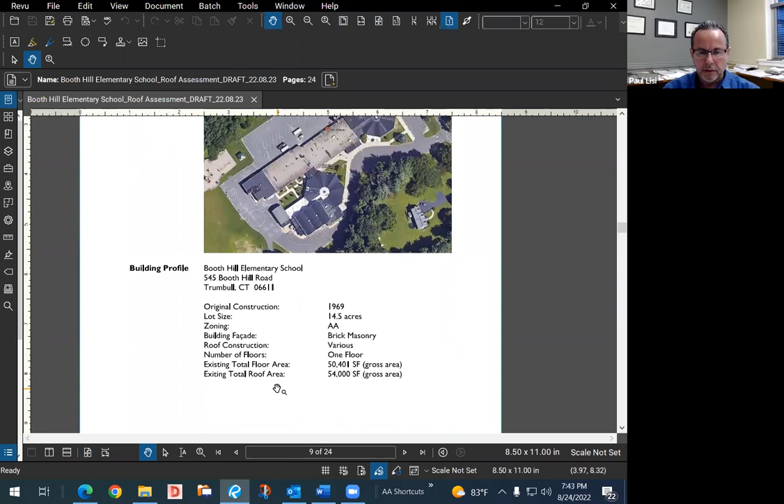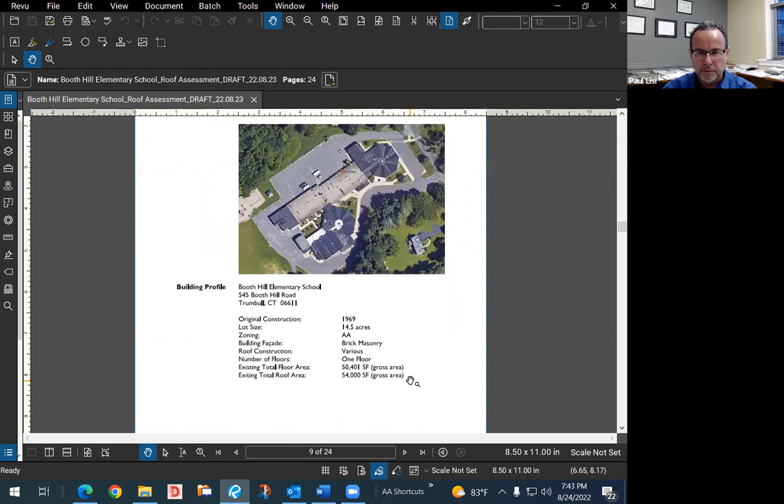I see actually there's a typo here, the roof area. No, actually, this is correct. 54,000 square feet, and the floor area is 50,000. So obviously the roof area is a little bit larger. So here's the entire roof. We'll get into the specifics, but you can see from this image alone that this is an older roof that hasn't been replaced in quite some time. This is a newer addition. These areas, I believe, were replaced in the mid 90s, the roofing. Okay. So moving on.

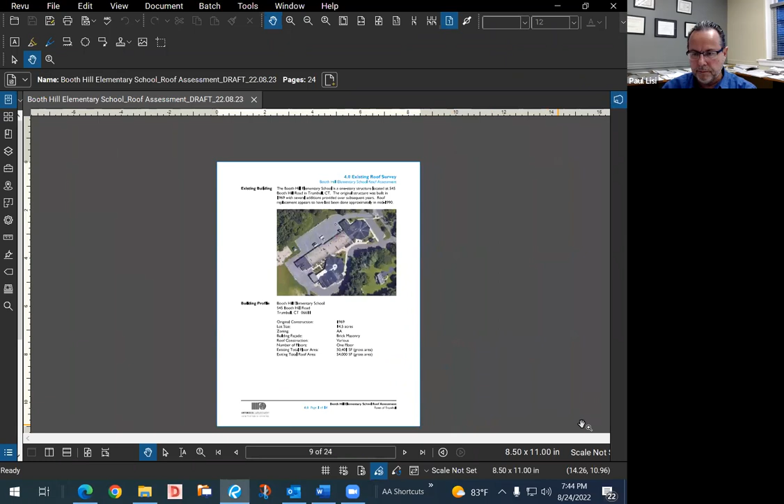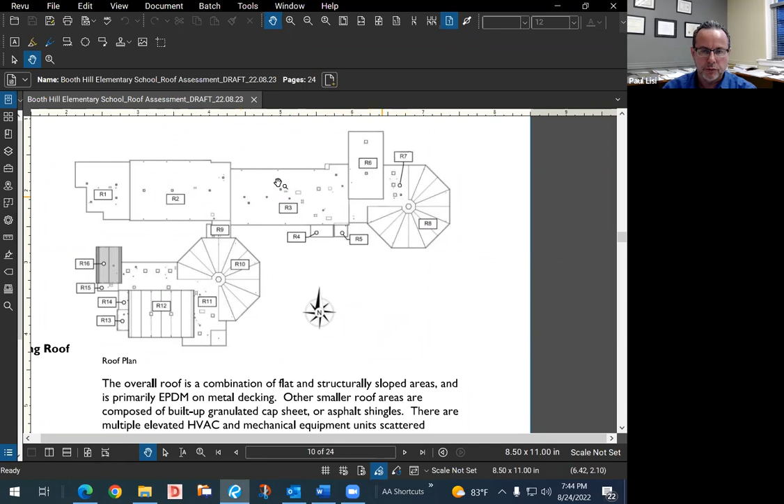We created a key plan to identify each of the roof areas from R1 all the way to R16, so when we're referring to these areas throughout the project, we could clearly identify which area we're talking about. If you go up on the roof and take a quick look, in general it appears to be in good shape. If you don't do a whole lot of exploration, there isn't anything obvious. There aren't any tears. I don't believe there's been roof leaks, at least that I'm aware of.

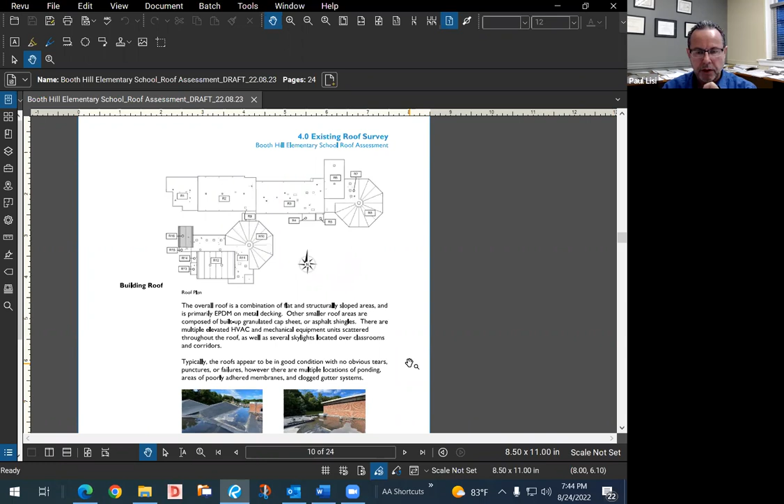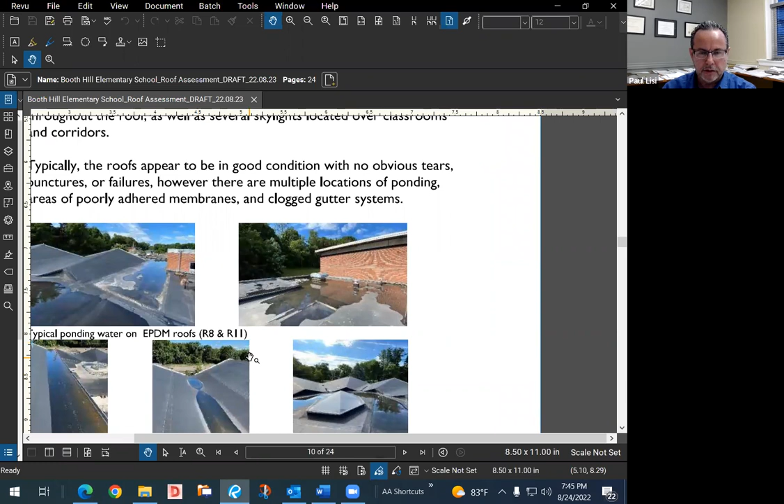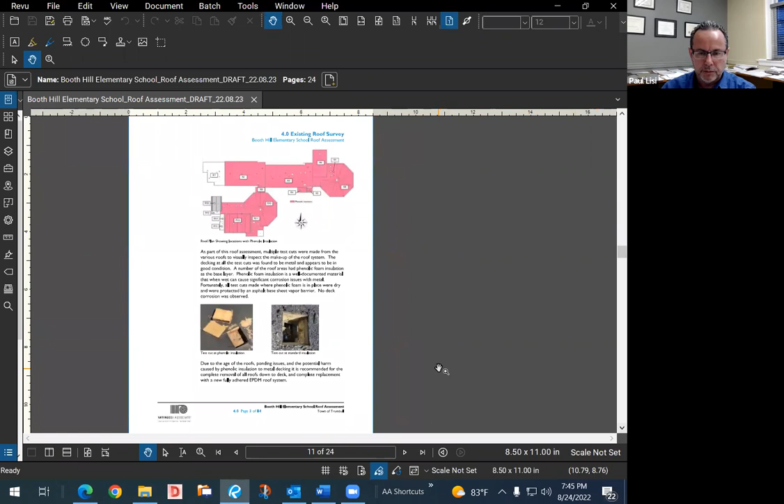There's some ponding you'll see from the photographs here, but that's not unusual, and we'll get into some of the specifics. But again, there wasn't anything that stood out as far as damage to the roofing membrane itself. Okay. So we'll go on to looking at each individual area. Well, before we go out there, this is important. Here's some of the roof cuts we've done. This shows you on the right typical insulation. This is in the newer area.

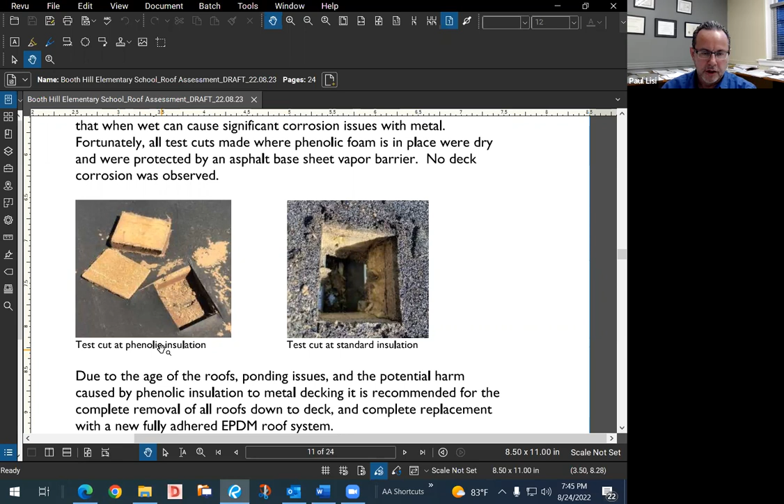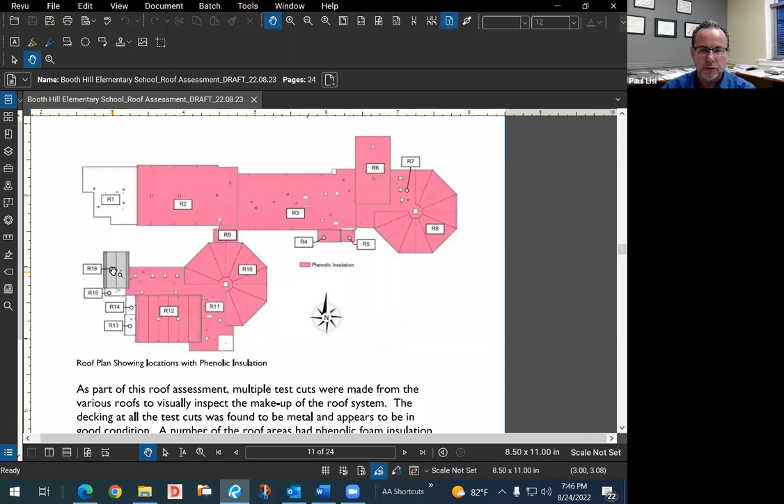On the left is a test cut of what's referred to in the industry as phenolic insulation. If you look at this diagram, everything you see in red has phenolic insulation. So clearly the majority of the building. This more recent addition doesn't have it, nor some of these newer areas and this asphalt shingle roof. But the majority of the roof has it. What's important to know about phenolic insulation is that it's basically a known item that creates rusting. It deteriorates metal decking.

The good thing for this building is that from all the test cuts that we've done, we didn't see any evidence of any rusting. Now, that doesn't mean there isn't any. But from the test cuts that we've done, we didn't see any rusting of the metal deck. So that's the good news.

And there's two reasons why we believe that we haven't seen rusting. One is that there hasn't been a whole lot of, if any, roof leaks. Because when the phenolic gets wet, that's when the problem occurs. The wet phenolic insulation has a chemical reaction with the metal decking, and that starts the corrosion problem. So there must not have been a whole lot of leaks, if any. And the other reason I think it's held up was because there was a vapor barrier installed between the insulation and the metal deck.

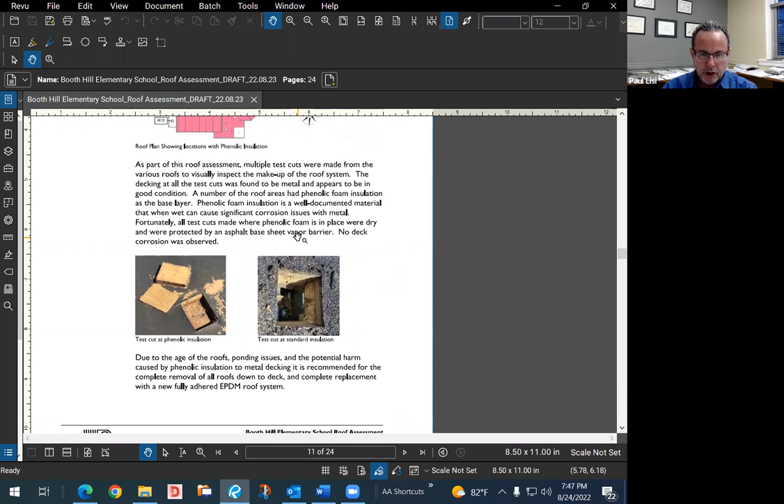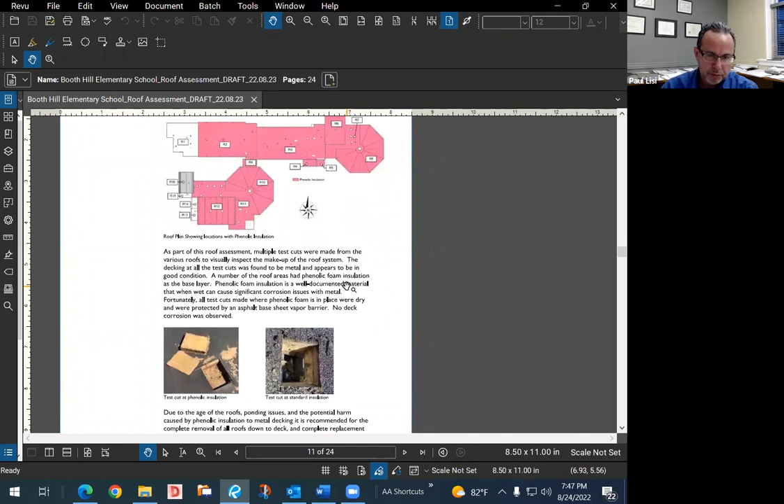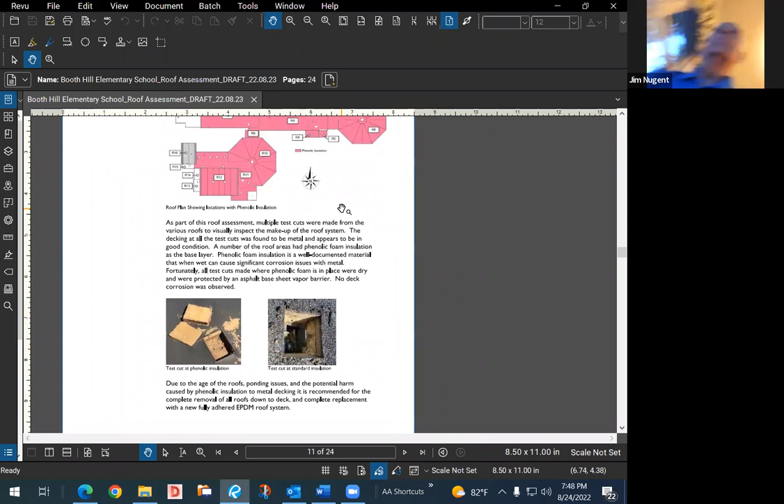So having said that, clearly this is something that needs to be removed, which would be removed anyway, but I just wanted to point out we did find that. And again, the good news is that, based on the cuts we've done, it has not caused any major damage to the metal deck, which is obviously a huge plus, because we've seen projects where this has caused substantial damage to the metal roof deck, and you can imagine the cost to repair.

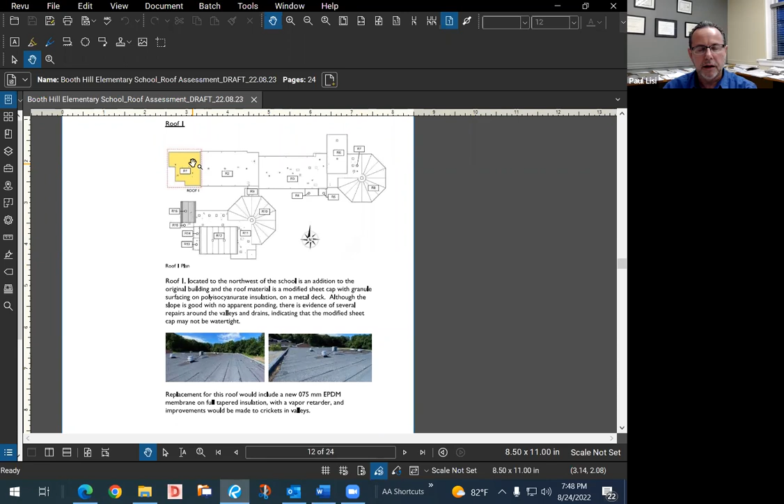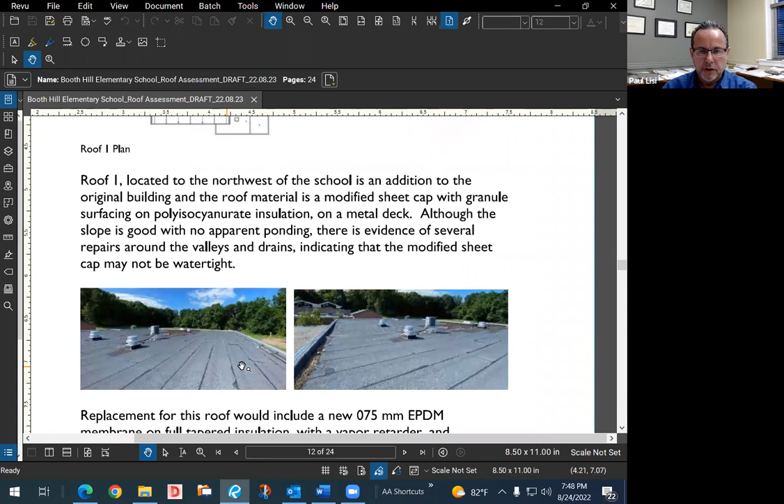So now we'll look at each individual area. Highlighted in yellow is what we refer to as roof area 1. This was an addition. I don't know the exact date of the addition, but clearly it's a newer wing. It has a modified bituminous roof on it. You could tell from these photographs. You could see the rolls of bituminous roofing.

This is in pretty good shape. Doesn't have the phenolic, but again, it's such a small area in re-roofing the entire building. Certainly, we wouldn't want to leave that out because it could be 20 years old, it could be 15 years old. I'm not sure, but it should be replaced as part of the entire roof.

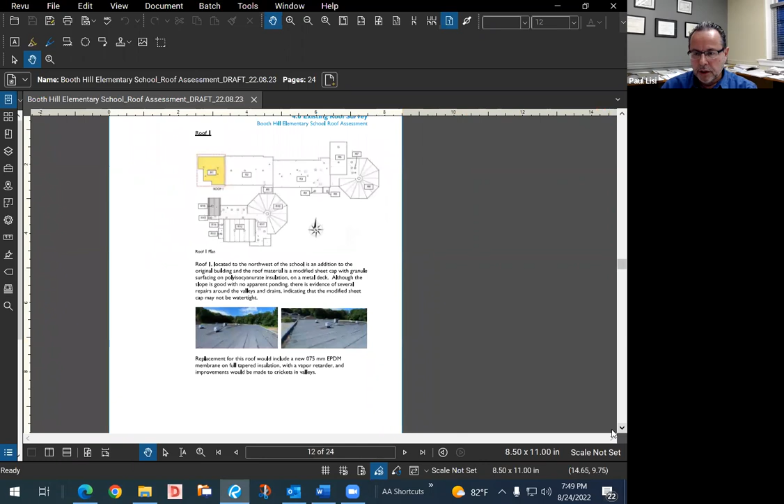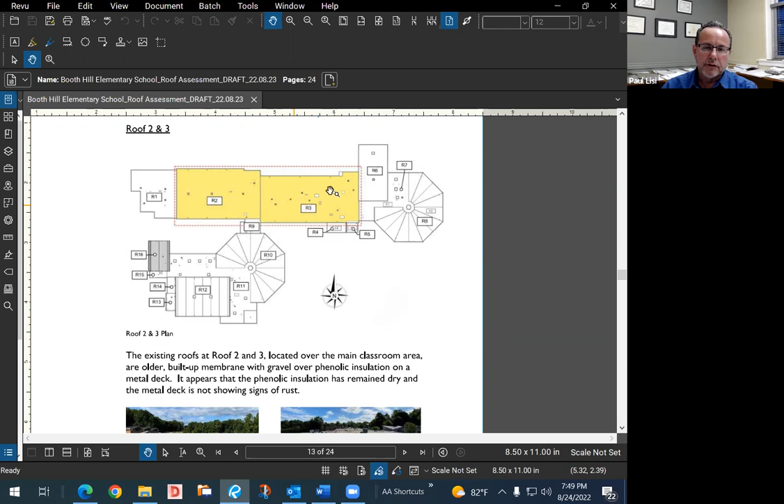The next area is R2 and R3, which you saw in the Google image, these are the oldest roof areas. And these are the old built-up membrane roof with the gravel. So these haven't been touched in over 30 years, apparently. So these certainly should be replaced. Okay.

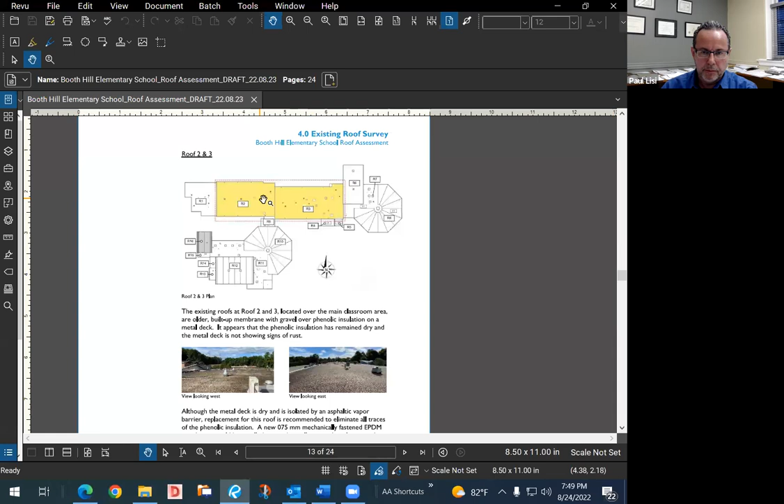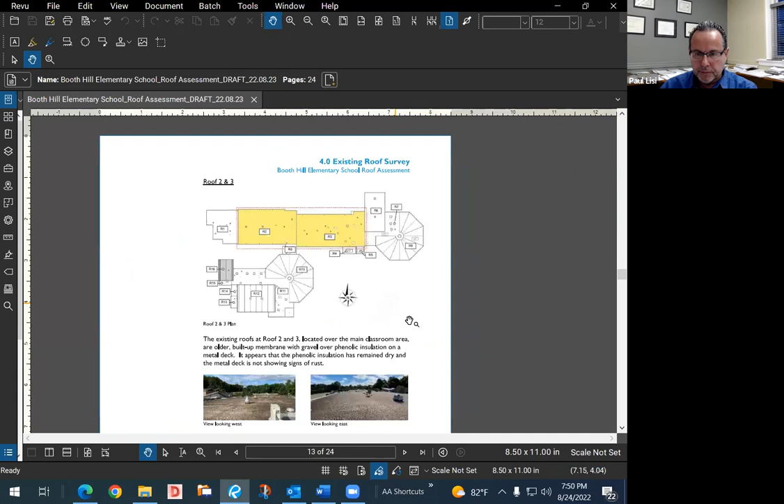These areas are pretty much dead flat. There isn't really any tapered insulation. There isn't a structure of the roof that's sloped. It's pretty flat, which is not unusual for buildings of this age. The R1 addition, that roof structure is actually pitched, has a slope to it. Okay. Now, then we'll go to the other areas.

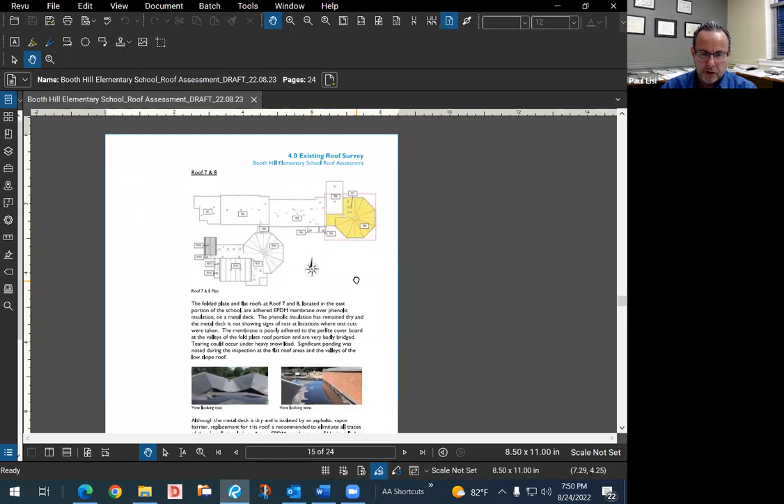R6. This is an EPDM roof. This, I believe, was replaced in the early 90s. Then you have what we refer to as folded plate roofs. I'm sure you're all familiar with them. These areas obviously are unique and have unique challenges. One of the important things that I want to point out on these is, can you all see this image of the valleys?

Yes. Okay, so I actually walked on part of this area myself, and what's happened over the years, the membrane must have shrunk a little bit, and it may not have ever been properly adhered. But you can imagine walking on a hammock or on a trampoline or a tent. This area here was not adhered to the deck, so you could see that the rubber was just suspended.

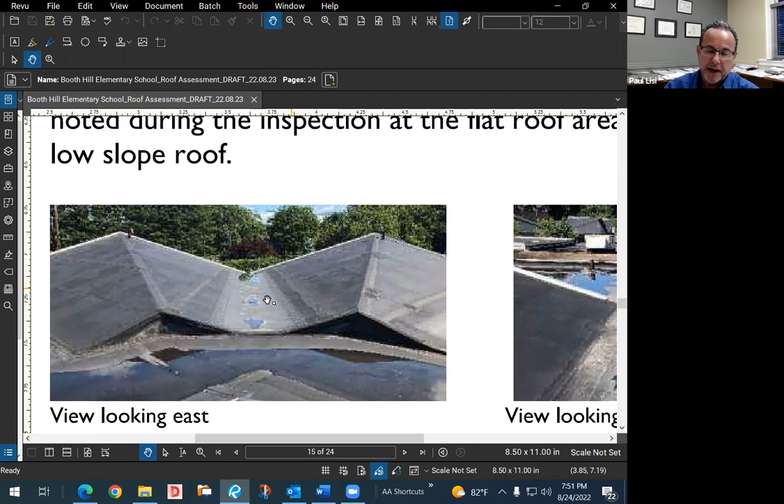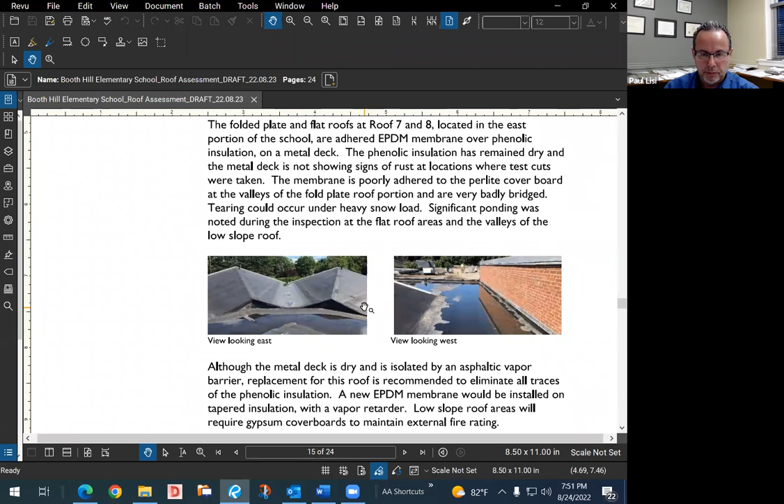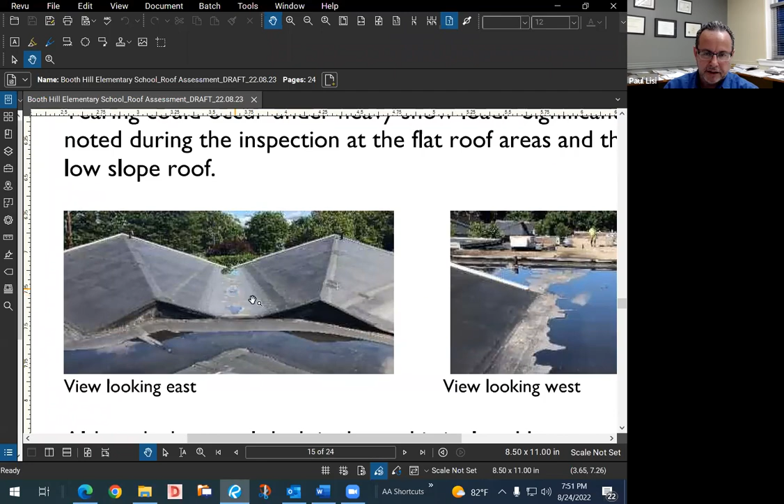And it's very fortunate that some heavy snow loads or somebody walking on it didn't puncture it. So those are major problem areas that certainly need to be addressed. There's some ponding here that we will look at. This is common for every valley in these folded plate roofs. Certainly something that needs to be addressed.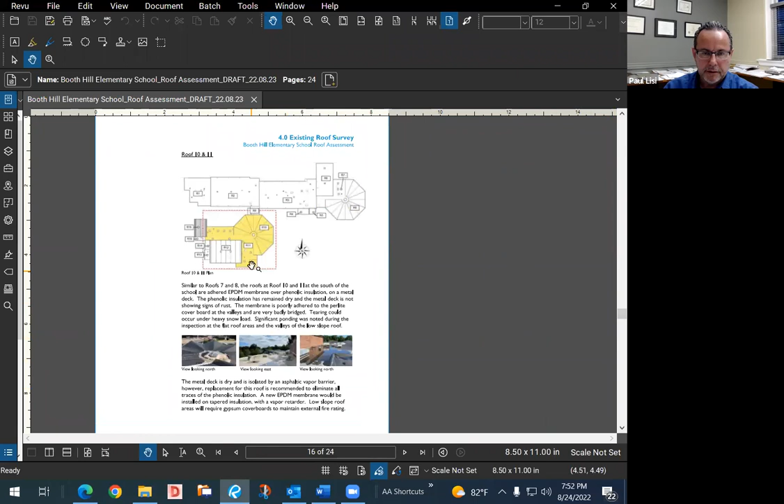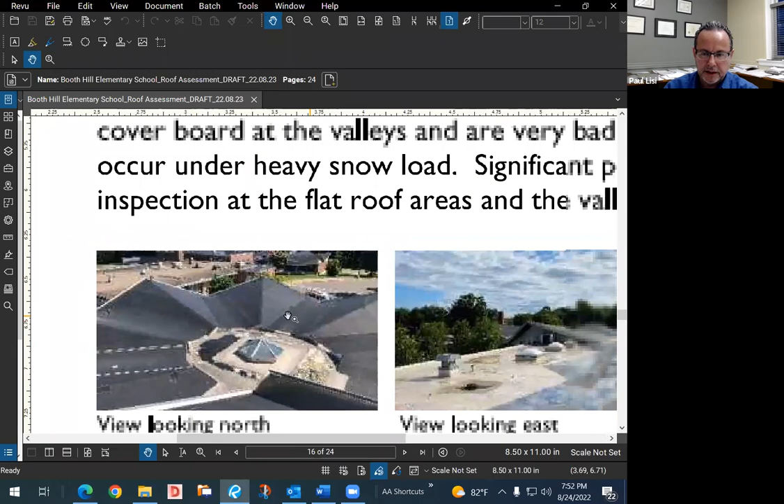Again, in R10, same issue. R11 and R10 were also early 90s. Again, you have these valleys. This is the R11 roof, some skylights. Here you have significant ponding.

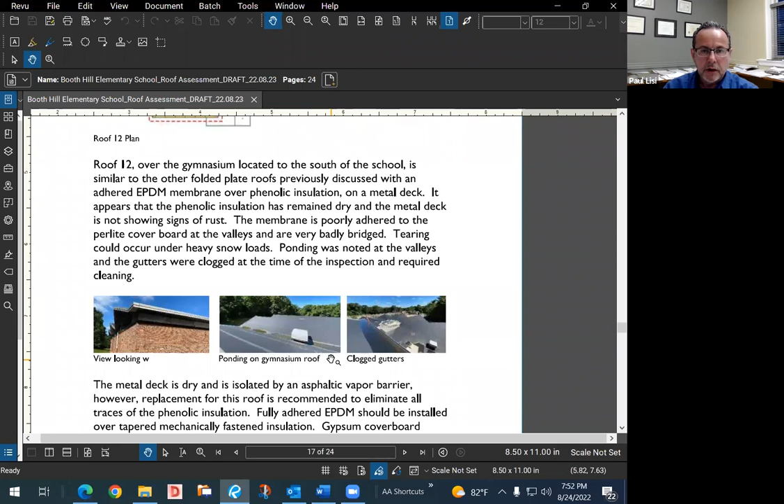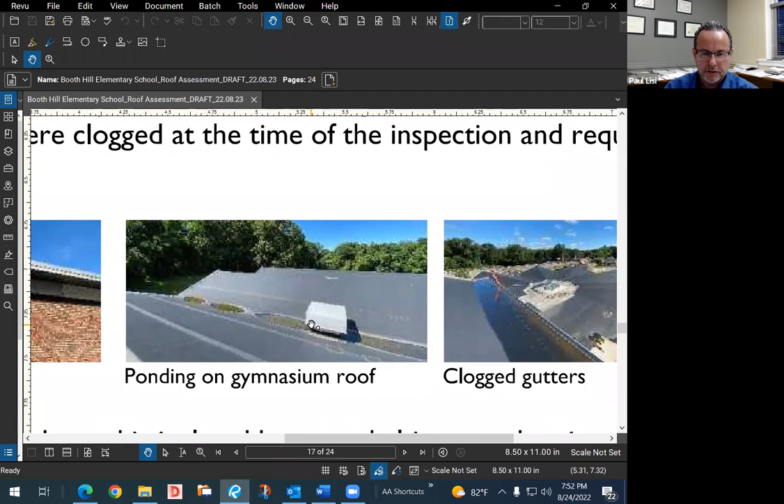And then you have the gymnasium, R12, which also has this sort of folded plate type roof. And you can see some ponding on here. This one was adhered a little bit better, wasn't as bad as the others. But again, it's at least 30 years old and needs to be replaced. There were some clogged gutters, but that's minor.

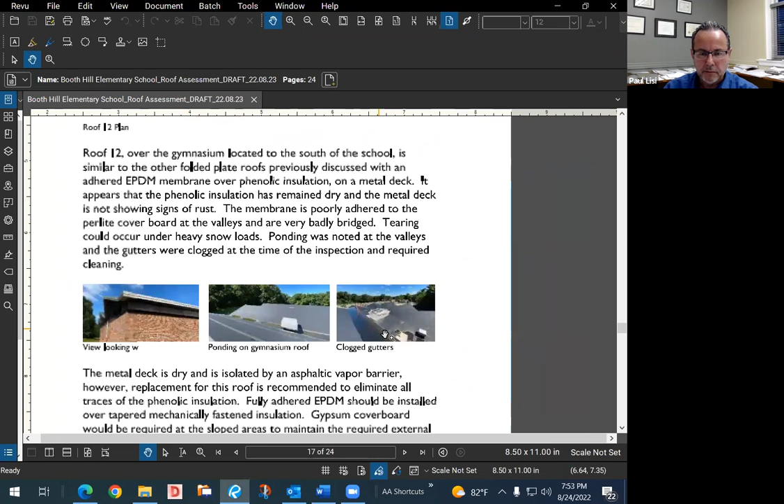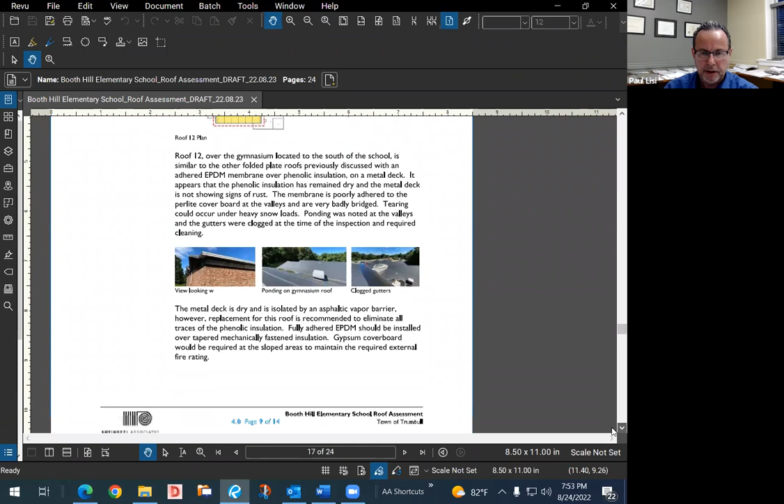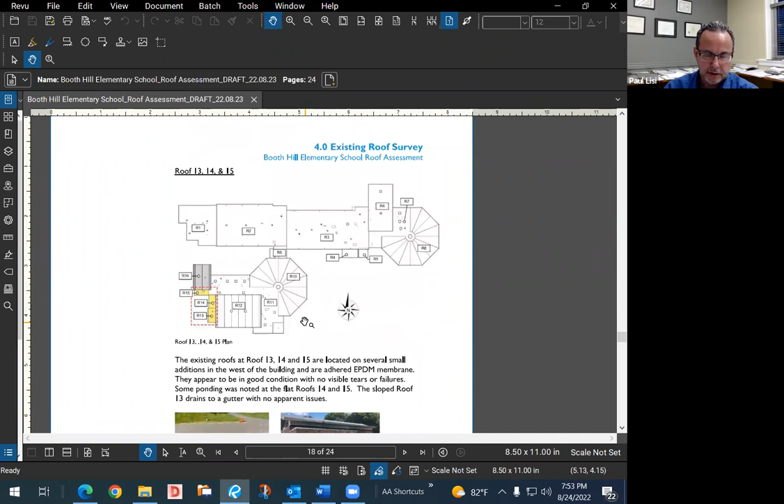Okay, and again, these were all replaced in the early 90s with EPDM. And the membrane itself is actually not in bad condition. Thank goodness, because there could have been major issues in those valleys, and there could have been major issues with that phenolic insulation. There's a few smaller areas. These may have been additions as well, such as R16.

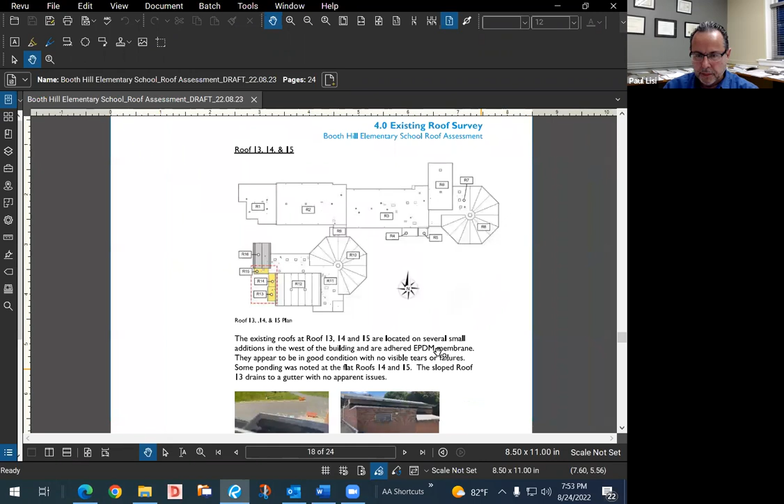And then the last one, I believe, is R16, which is an asphalt shingle roof, which again, it's such a small area that, since we're doing this entire project, I would say to just go ahead and replace that asphalt shingle roof as part of it. I think it's fairly old as well. There were some warped shingles, so I would recommend replacing that as well.

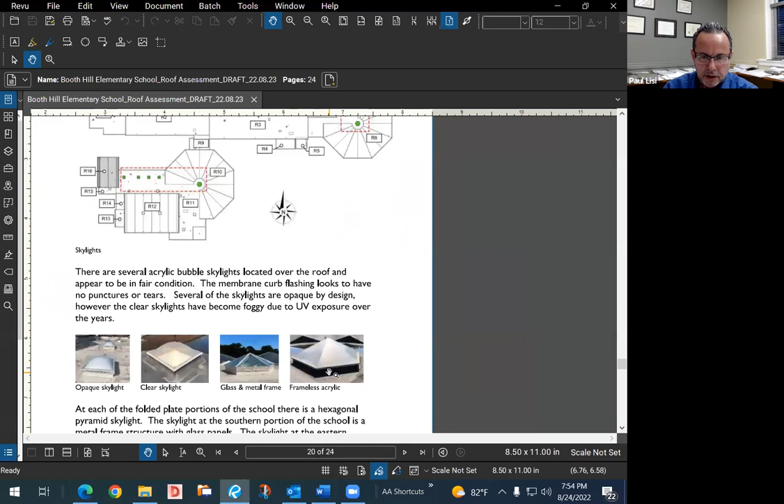Looking at the skylights, there's basically two areas that have skylights. In the center of this folded plate roof, there's a large skylight here, and then on this one here. And then you have a few smaller skylights in these flat areas. Here's that pyramid-shaped skylight that's in the middle of those folded plate roofs.

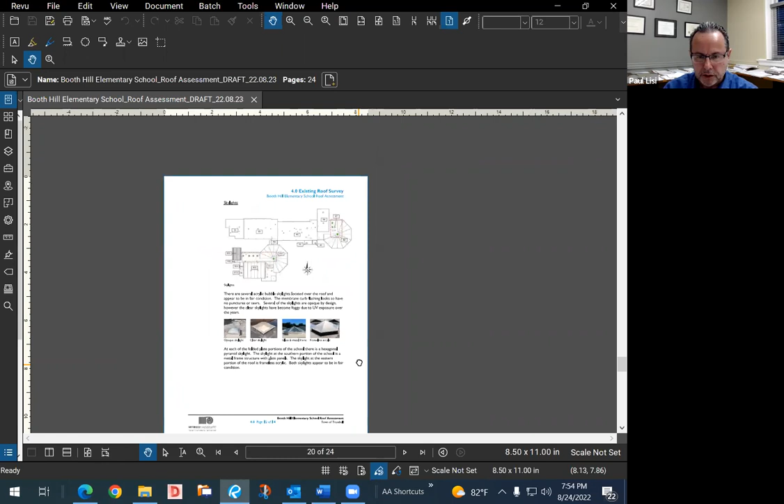Some of these may even be original. I would definitely want to replace these as part of the roof replacement. There's not a lot, so it's certainly worth the effort.

So in summary, because there are so many different geometries in this roof, all these angles and valleys, we are proposing to utilize a 90 mil roof for those valleys and the folded plate, and then a reinforced 75 mil EPDM roof for the balance. And so when we consider the different types of systems, we look at cost of material, right? We look at availability, we look at cost of labor, and certainly code requirements, the type of building it is, all of that, of course.

So having said that, today, obviously labor costs are very high, and factoring in all the unique conditions of this roof, we are recommending a reinforced 75 mil for the majority of the roof, and a 90 mil, which is a thicker roof, for the folded plate areas. And by default, this is going to give you a 30-year warranty.

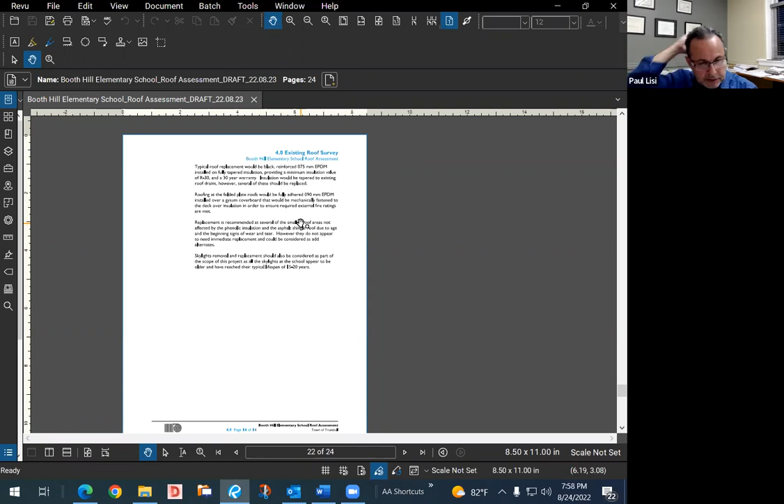So again, I want to emphasize this is a work in progress, and it may change as we continue through this. But you know, it's 90% there. So before I show you the tapered insulation plan, does anyone have any questions on this report?

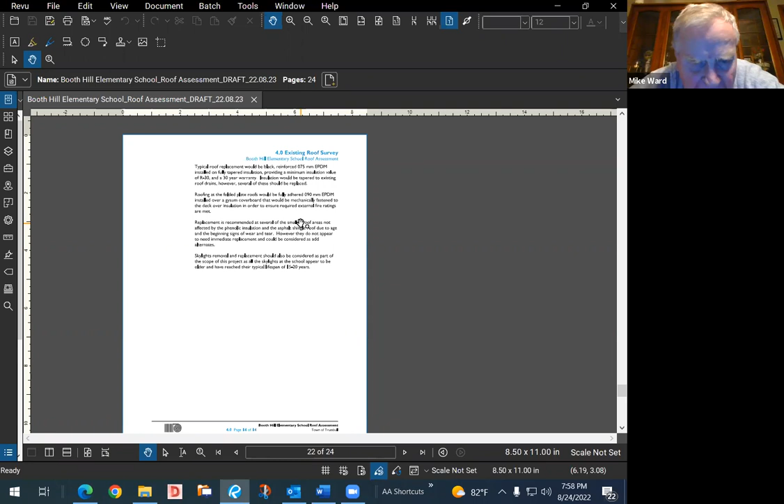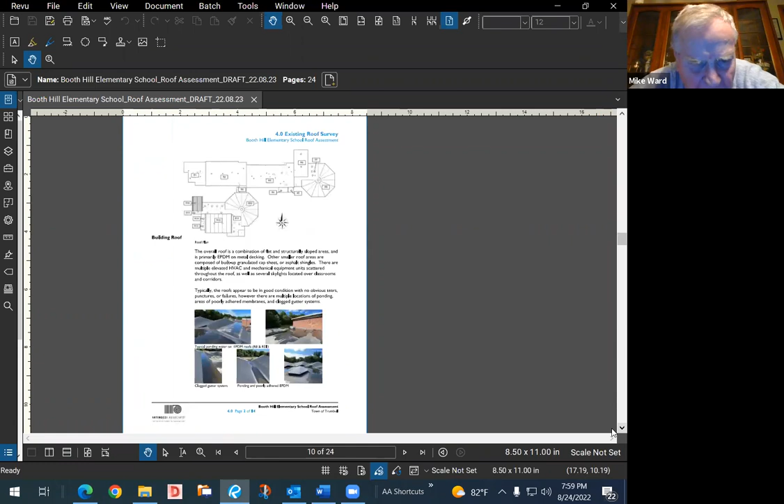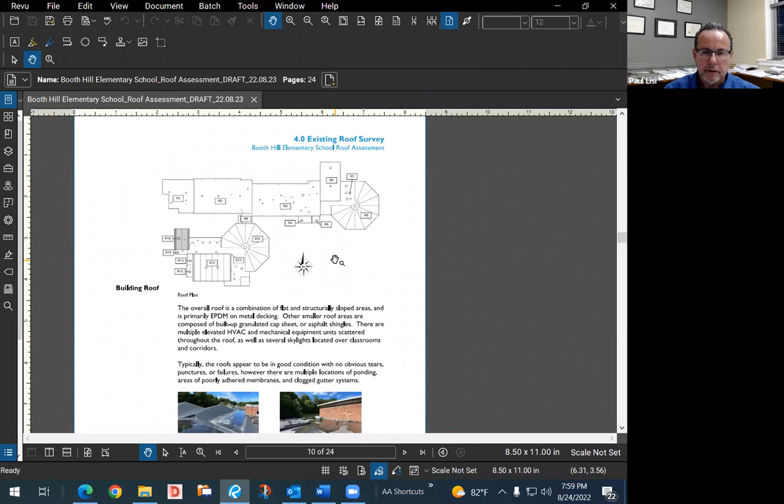Because I was the principal there in the 90s, the water was gushing down from the roof into the school for about three weeks before they decided to replace the roof. And then they did it back in the 90s, I guess. Yes. The addition of the TLC room may be the one you're talking about. This one was here? The roof over there. Yeah.

Then they added in 57 the additional rooms. And it was later on in the mid-70s, they decided to put the additional parts on it, make them all 21-room schools. The philosophy at that time, when Tashua School and Daniels Farm was built. But another reason why the roof, the old portion, was there was quite a bit of vandalism going on. Kids were coming in weekends and getting ladders and jumping up on the roofs.

So after the new building, a new roof was put on in the 90s, we had better security and there was no more walking up on the roof, and it was limited just to the head custodian to go up there, and nobody else was allowed on the roof. But you had to pretty much hit it on the way.

But the reason they replaced it in the 90s was the entire old section of the building, the water was coming down the walls. And Dr. Yetman was the superintendent. When he walked over and saw it, he said, I think we should replace it. I said, I think so. But it's an old building, but we'll see what happens. It was a nice report. Very nice. Thank you. Thank you, Mike.

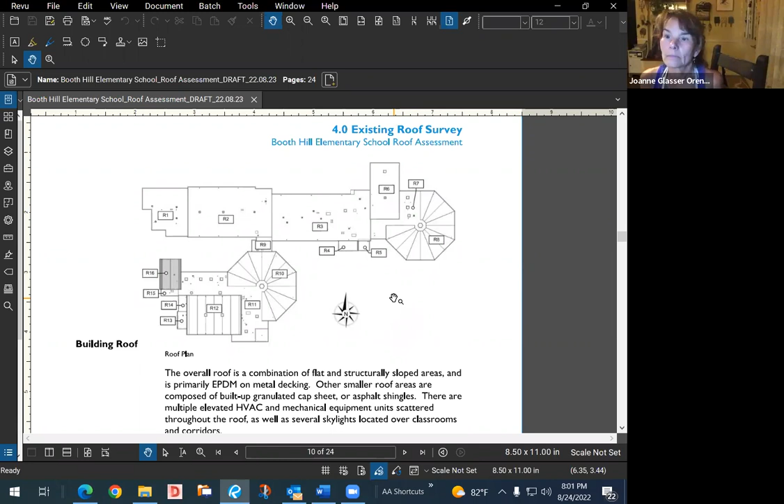Well, actually, the next diagram I will show you, we are proposing to do something that will alleviate that same issue happening again in the future. Thanks. So I have a question. Somebody else have a question before me? Okay, so this report is predicated on keeping this steel deck, am I correct? Yes. Okay.

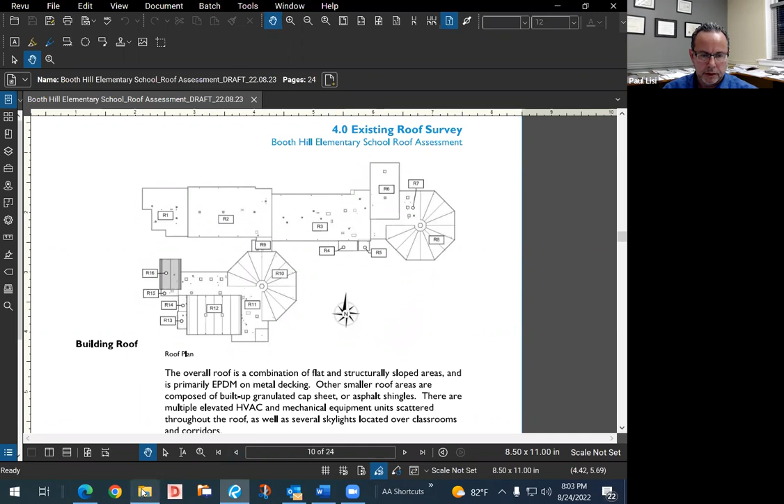So this is different from what we've proposed for the Middlebrook Elementary School. In what sense? Well, haven't we created a wooden structure in case we want to put solar panels at some point? No. I'm sorry. I misunderstood. Sorry. No worries. Okay, so if I could, I'll move on to, I want to show you what's referred to as a tapered plan.

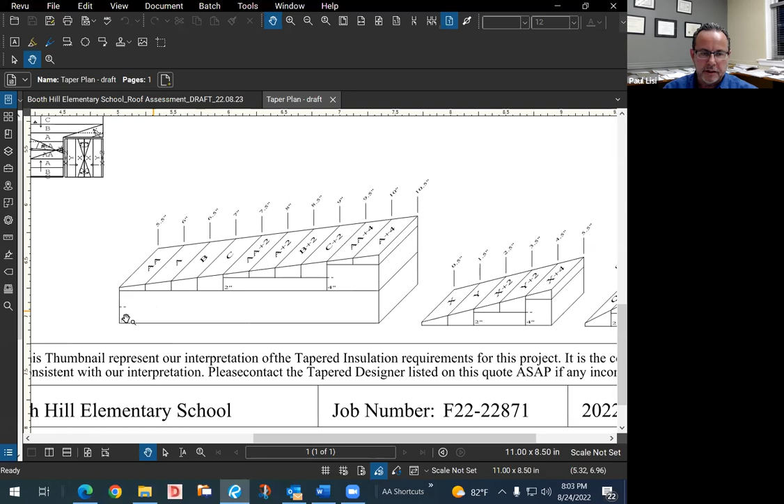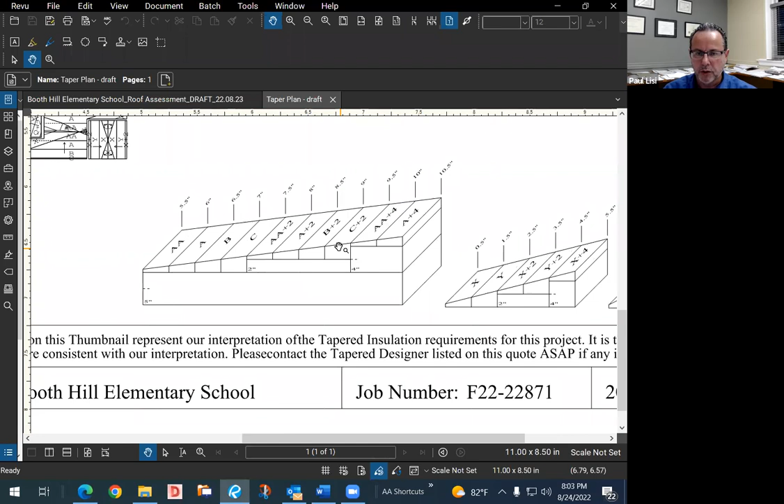Okay, this is a drawing that is generated by the manufacturers of the insulation. Okay, so I'll zoom in on here. There's a base insulation. It's 5 inches, 2 layers of 2.5 inches. That gives you your minimum R30 of insulation that's required by code, okay? And then everything else on top of that is tapered. And that's to provide the proper slope that's required by code of 1/4 inch per foot, okay?

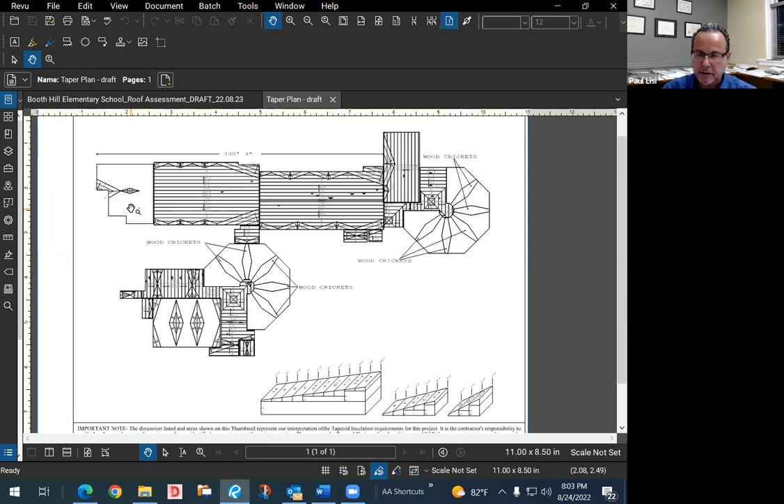That's very common to do because a lot of these older buildings, basically, the roof structure is dead flat. Unlike this area, the newer addition, this has a sloped deck, so there's no need for tapered insulation. Everywhere you see all these lines here, this is all tapered insulation. Again, not unusual, this is common. So what you see is, zooming in here, what's also nice about these buildings, most of this anyway, is that the drains are along the perimeter.

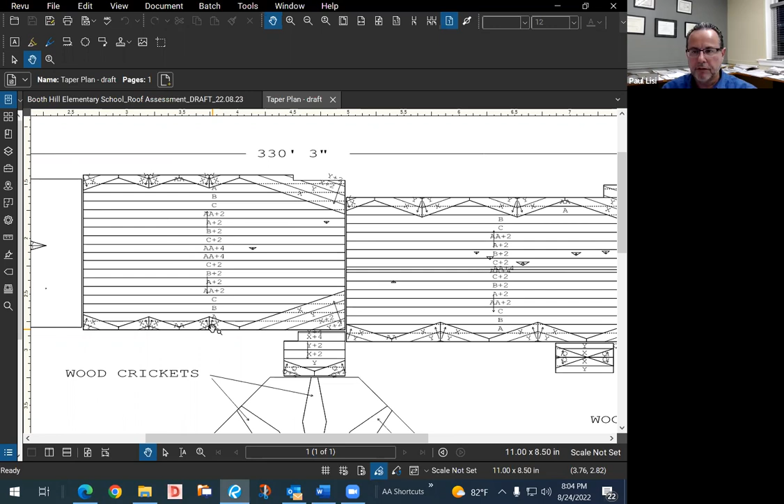What's good about that is that, unlike Middlebrook, where we had to introduce additional overflow drains internally in the building, in these cases, because the drains are on the perimeter, we can simply add scuppers, basically just small notches in the fascia. So if the main drains here get clogged, the water would simply flow out the scupper. Unlike if the drain was in the middle, we'd have to add another drain to get the water out. Okay, so that's the good news, so that's mainly these two larger areas.

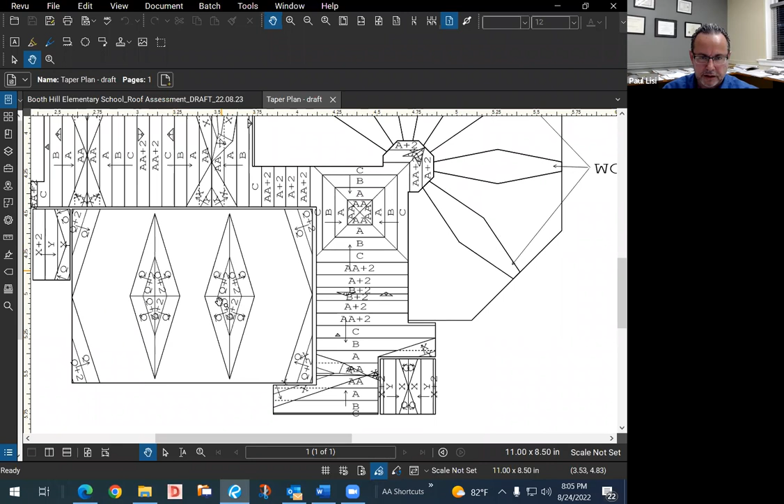Obviously, these folded plate areas have plenty of roof slope. And then the gymnasium is also, the roof structure does pitch. But we still are adding some tapered insulation. With these, what you see, these are referred to as crickets, if you're familiar with the roofing industry. And what all this does is take the water away from the valleys. Okay, you create these crickets so that you don't have ponding. So that's what we're proposing there.

Now, the question earlier from Joanne about, we don't want this to occur again. What we're proposing is to build up these valleys. If you can see where I'm pointing, it says wood crickets. Okay. Basically, what we're proposing is to build up these areas with wood framing and plywood, to not have these just simple valleys that we could have problems again in the future with the roofing.

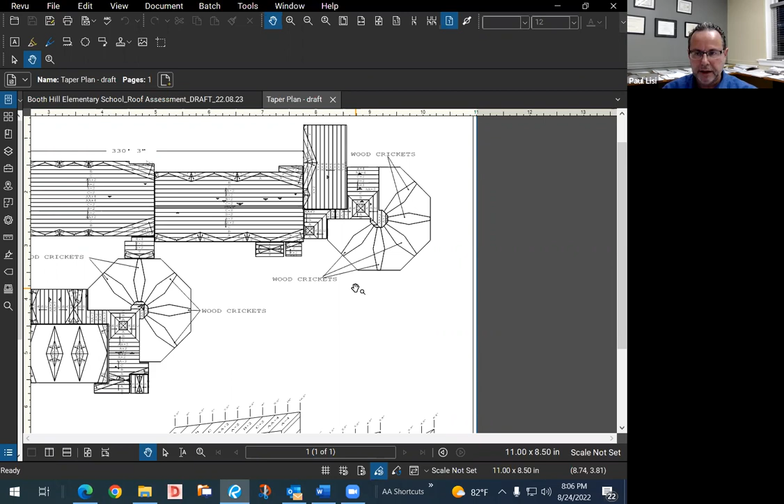So why not do this with tapered insulation? Because it would be a lot of tapered insulation. So rather than do it with tapered insulation, it would be less expensive to basically frame it out of lumber with plywood, and then put the roofing over that. Okay, so that would eliminate any ponding. It will eliminate any future issues with the roofing potentially delaminating and creating problems like it is today. Okay, any questions on that?

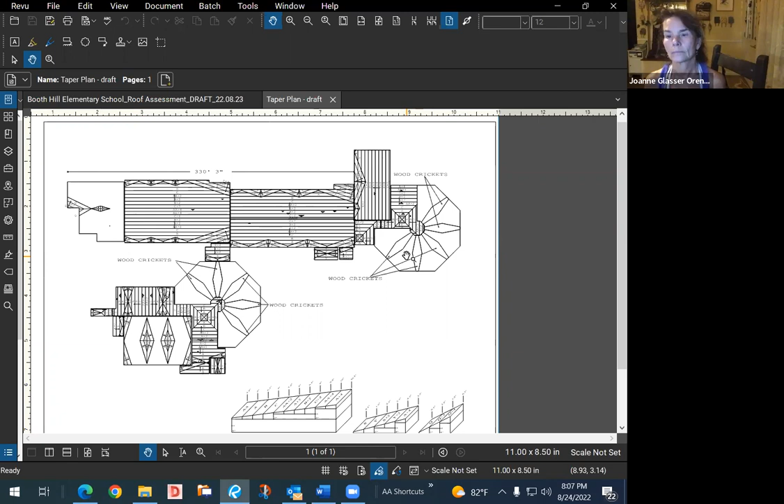Well, would it look significantly different, or would it look pretty much the same? Well, certainly not from the road or from the ground. From the roof level, let's see if I could explain it. Right now, you have a simple valley, which is like a V shape, right? Comes to a point. So if you can imagine, snow and ice and water piles up in there.

So what these crickets do is that it elevates the area in the center and then it slopes it to each end so that you don't have any sort of dead valleys. But we would not be able to see that from the ground at all. Where would it drain off, Paul?

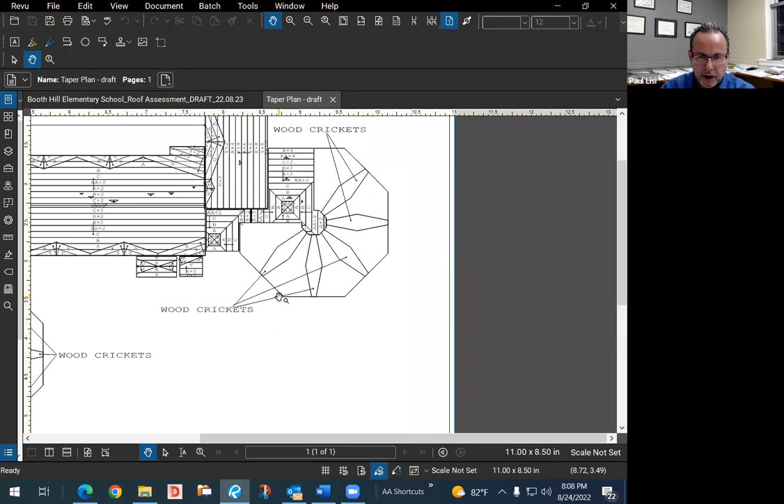Well, one side would drain off into the center area like it does now, and then the other small portion of it, I don't recall, but we may have to add a leader at each of these points, if you can see, just to pick up a little bit of any water flow here. But it would be a huge improvement to what is a challenging roof area.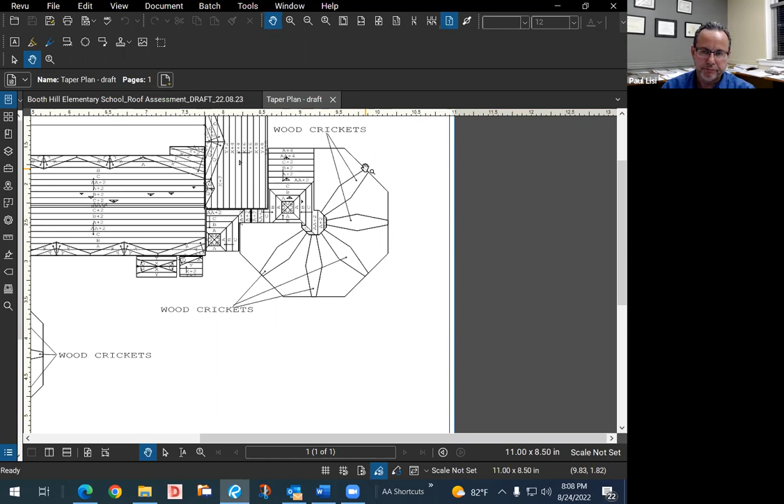Is that clear for everyone? Yes. Do other people have questions? Okay.

Oh, I do have a question. Let me ask this. This is from Joy. She's having an issue with her mic. The question is, sorry, I lost it. What is actually the type of wood that would create the cricket? Is it plywood or is it something that is going to last longer?

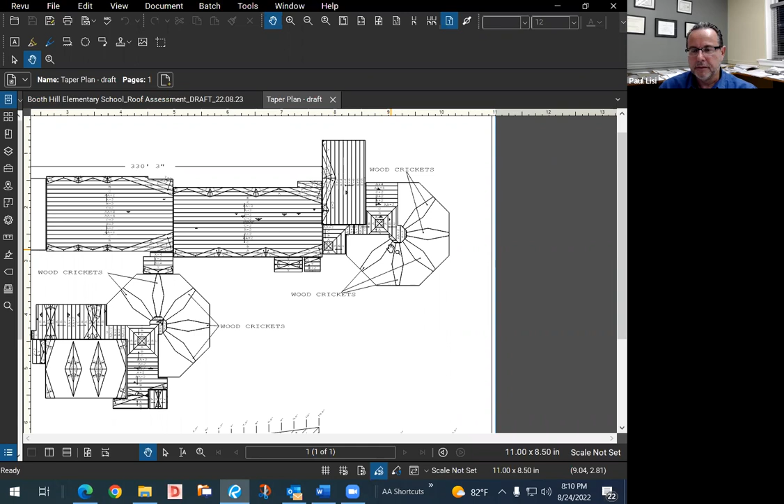Well, the surface would be plywood. Plywood is on many roofing systems. Your typical asphalt shingle roof, the base material is plywood. Right. So it'll have waterproof membrane. It'll have vapor barriers. It'll have the roof membrane itself. The plywood itself will be pressure treated, exterior grade.

It's not unusual to use it. I mean, wood is used for blocking in the parapets, the edge conditions, and it can be used on a limited basis for a building like this. You couldn't build the entire roof out of wood. That would not be allowed by code. Any other questions? Dave, are you good with that?

Yeah, I am. I like the idea of the wood crickets, to tell you the truth, Paul, because it won't allow so much stress to develop in the membrane as it shrinks and expands with temperature. So I kind of like this idea. I think it'd be much better supported, and I think we'll get better drainage. I believe there's already, not a scupper, but kind of a collector at the top of a leader at each one of those valleys right now. Yeah, there may be. I don't recall.

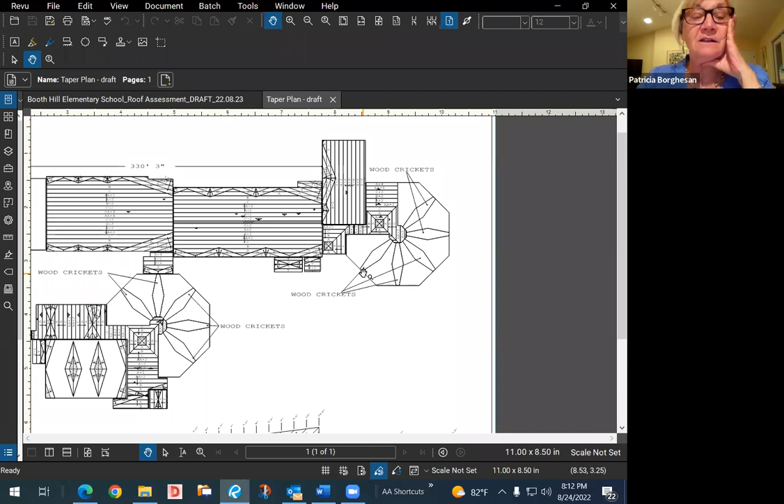So if I understand this correctly, basically you're creating pitch on the two large flat roof sections, or actually throughout the roof, through the insulation and then through the crickets. Is that correct? Yeah, the tapered insulation, wherever you see all these lines, that's tapered insulation. For example, at Middlebrook, the majority of it was all tapered insulation. And again, that's very common for older school buildings like this, because they built them with pretty much dead flat roofs. Right. But nowadays, when we build new buildings, we slope the structure, the deck.

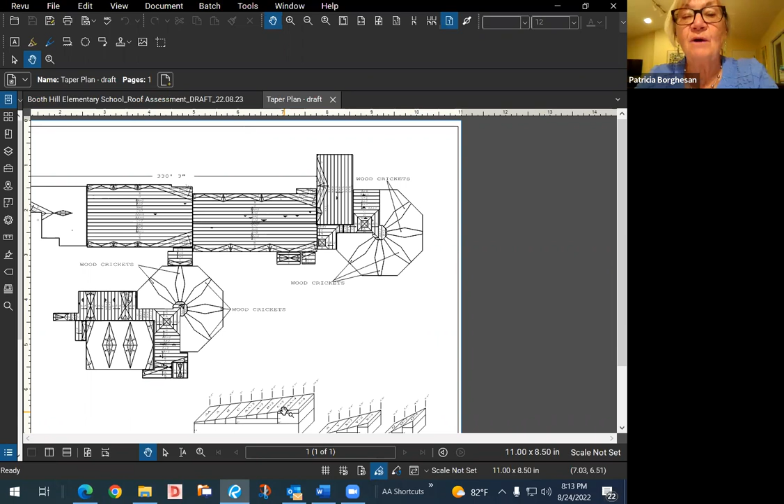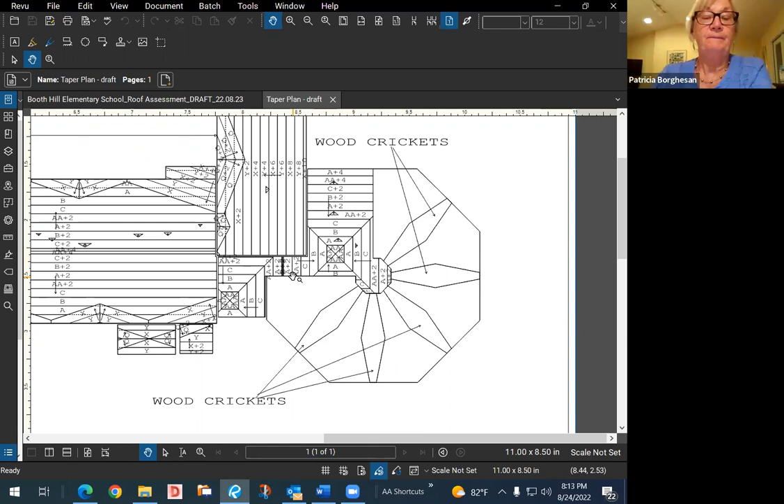So just to ask, I think you've answered this. Would we need additional drainage from the roof? Thank you for reminding me. There are a few areas where we may want to add. We haven't fully looked at it closely yet, but like some of these areas where it's very tough. Right now we're showing that we can make it work with the drains we have, but we're going to take a closer look at it once we get further into it. Okay. Well, it'll be minimal if we do it. We may need to add one or two, perhaps here and here.

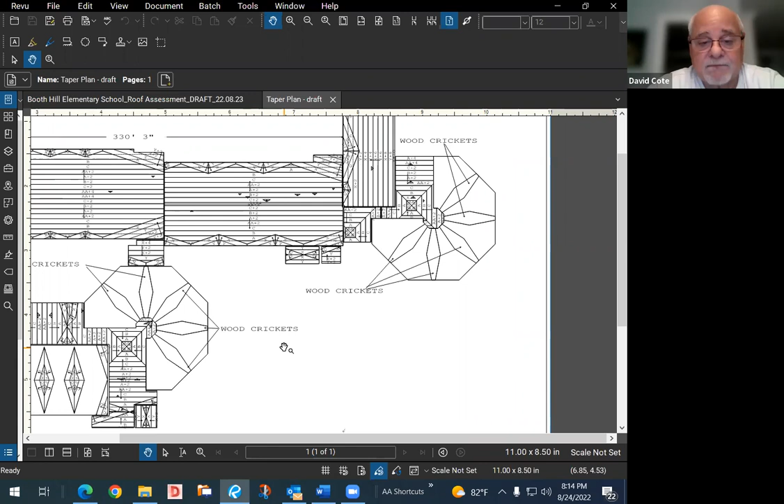Paul, in the conditions where you have internal drains like that, you will come up with an overflow type system for a drain? Yes, yes. Okay, I got that. And again, on this building, it's minimal because there's not that many internal drains. That's a good thing. Yes, it is. But we do have a few here and there. Right. Mhm.

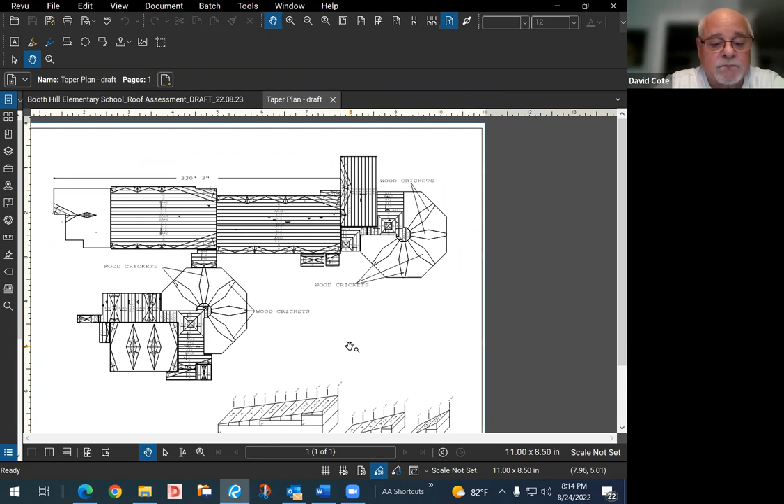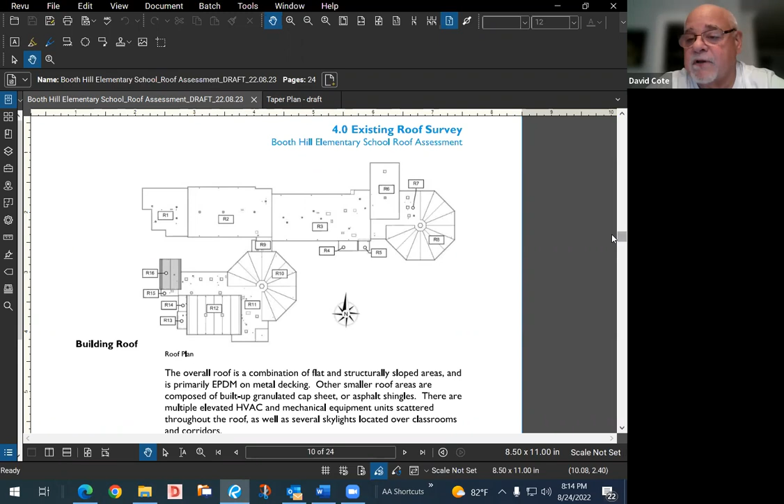There's a couple rooftop units, I believe, maybe in the office area only. Yeah, very few. Like here, there's a couple here. Yeah, the office area, yeah. All right. Not a whole lot. Yep. Okay.

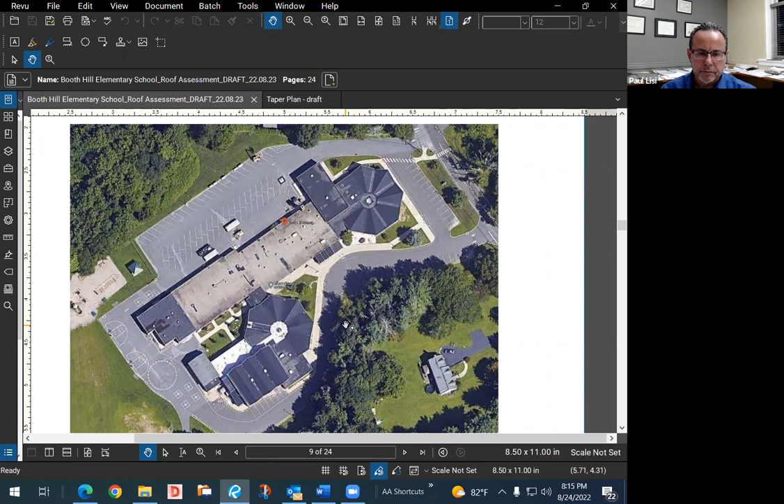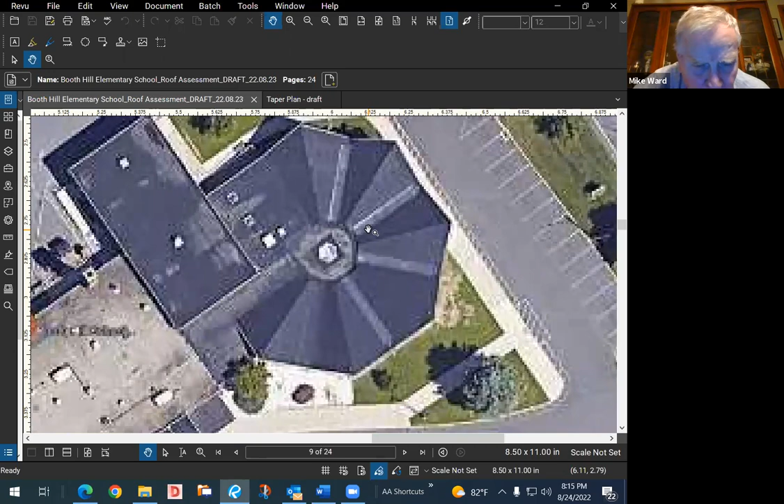Madam Chairman, here's a quick question. This is an assessment of the Booth Hill roof. Is that what Paul's doing for us? Yes, that is correct. Has to be done? We haven't awarded the contract for this Booth Hill school yet, have we? No, we have not. So we're just getting a preliminary report on what it takes, just as an assessment that Paul's talking about. Correct. Right.

This will allow us to apply for the grant. And in addition, it will allow us to have a detailed report for the Board of Finance or the Town Council when we go for capital funding. Yes. And you'll have a budget as well. Yeah. So we've already awarded the Middlebrook roof, right? And it's working.

Are we talking about something during this school year of putting Booth Hill in the same capacity for next summer, or are we just postponing for another summer? No. I think this would be the following summer for Booth Hill. Not next summer, but the following summer, hopefully. Correct. Dave, are you concerned about this assessment they're doing in all the buildings? Will this affect any of this work that we're doing as a committee?

You're muted, David. Yeah, I don't believe so. We're doing an overall condition assessment, which will certainly cite that the roof needs replacement. We're doing several assessments right now. We're doing an overall district-wide master plan that includes facility condition assessments. That will also help us develop a strategy for capital planning.

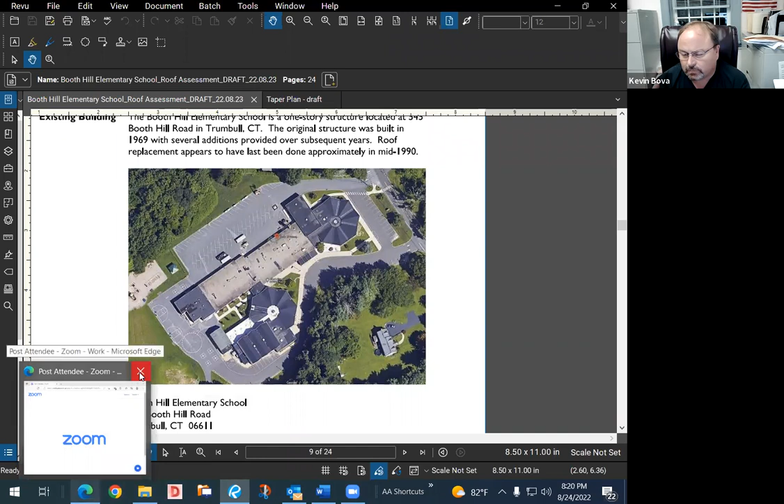We went out, obviously, we used Paul as an on-call architect, which the state wants us to go out now to get an architect for the next roof. So we did the roof, we went out, we're ready to go. We said, no, let's get state reimbursement, went through a process, took a while, a bid came back, over budget.

We need to concentrate on Middlebrook's roof, getting that from the state, what Dave is doing very soon, to get that out and awarded, because you keep saying contract. We have no contract for Middlebrooks. We need to get a bid back out on the street when we have the state approval money for the grant, because you guys want state money, 30-something%. You have to go out to bid within the next 2 to 3 months and have it back in and awarded to have that roof, Middlebrooks roof, done by next summer.

In the meantime, we're also trying to do Booth Hill. So they hired Paul, which we agreed upon, to do an assessment. The assessment obviously is going to say, yes, we need to do the roof. We had the bonding. Now they have to go in front of the budget system again this year. And hopefully that gets done in March or so. And hopefully the state is on board with that.

We would have to go out for an RFP for an architect to put this together. That has to get awarded. Probably middle of next year, say summer. When that architect is ready, like what Paul did on the first one, Middlebrooks, we would go out, work with them, get a bid. But again, this time next year or September, to put a bid out for Booth Hill for the following year.

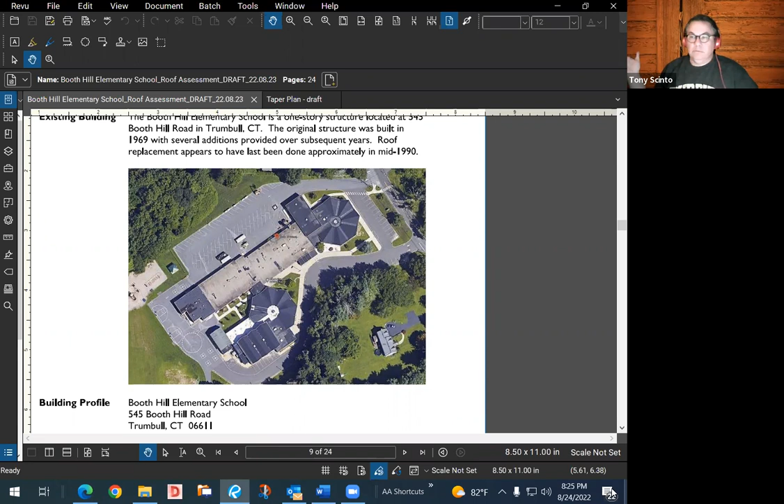Is that right, Kevin? Can you comment on that? Yeah, I can. I talked to other towns. When this first roof evaluation came up, and Paul knows about this, a certain priority person came in and gave us costs for 3 roofs. And that roof was very high. And we really had a cost estimate from other architects, not only Paul, for like $1 million, $1.2 million for Middlebrook.

But we stopped and said, hey, wait a minute. And I remember who it was. The town council person said, hey, should we go out to state funding? And I'll be on record and say, not if you wanted to get it done in that time frame. But we went for it. We missed it. The cost obviously did go up because of COVID, which is not to blame on anybody, but it did go up. And other roofs were accomplished at that time when we missed our boat.

But listen, we all agreed to that. We want to save money. Even with state money, we're going to pay more for this roof than we originally probably could have done it for, without a committee, without anything. I'm just being honest. So if we're going to go forward with this, please, let's try to get the state now to lock in so we can get this one done for next summer. That's all I'm asking for Middlebrooks, because I need to get the bid out sometime in October. I think Paul knows this.

We have to go through drawings, prevailing wages we still have to get. There's new stuff we have to update when we go out to bid. I want to lock a vendor in before they all get locked in for next summer. And the prevailing wages is because you're using the state's money, correct, Kevin? Over 100,000, yeah. But they change almost every 2 weeks. Okay.

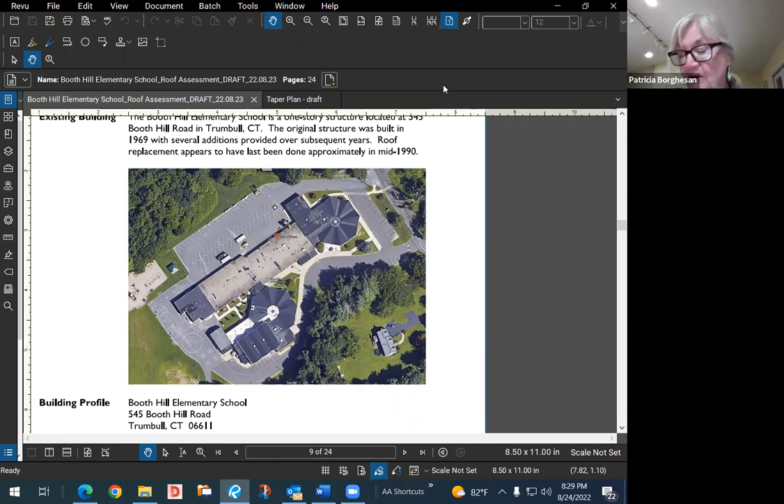Can we pass this by unanimous consent, or do I need to do a roll call? I don't hear anything, so I believe we can pass this by unanimous consent. Okay, everybody, thank you. All right. The almost final item is we've received the invoice. Well, first I should thank Paul for all the work on this and the comprehensive report. I think it was very helpful. Certainly answered questions that I had.

But the next item would be for us to approve the invoice that Antonazzi Associates submitted for the Trumbull Booth Hill roof assessment. The amount on this bill is $5,280. The total contract amount that we had approved is $6,600. So could I have a motion from someone to approve this invoice? I'll make the motion to approve the invoice. Okay, thank you, Joanne. Could I get a second? Lynn Salt, I'll second that motion.

Thank you. Is there any discussion on this seconded motion? Okay, can we pass this by unanimous consent?